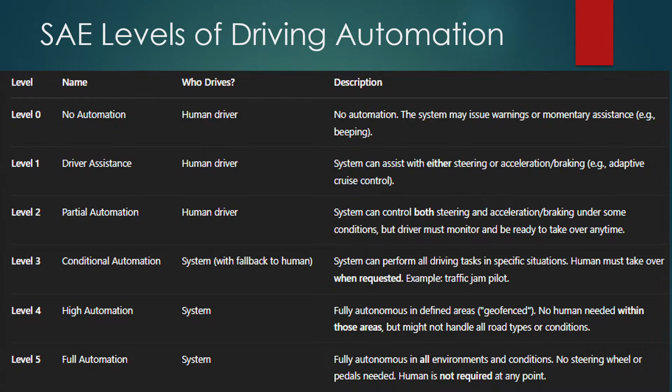So then we can see each level one by one with examples, so we'll understand it more. First, level 0 is like the conventional mid-range type of cars. Then level 1 is driver assistance system, where there's adaptive cruise control for speed only.

Lane keep assistant steers briefly to stay in a lane, like in Hyundai Elantra, Ford Focus. Then partial automation examples are like Tesla Autopilot, GM Super Cruise, Ford Blue Cruise, and Mercedes Benz Drive Pilot.

This is level 2 plus in some countries. Then level 3 is conditional automation. Mercedes-Benz Drive Pilot is certified level 3 in Germany and some US states, operating in traffic jams under 60 km per hour. Then Honda Legend in Japan is the only level 3 sedan, only available there.

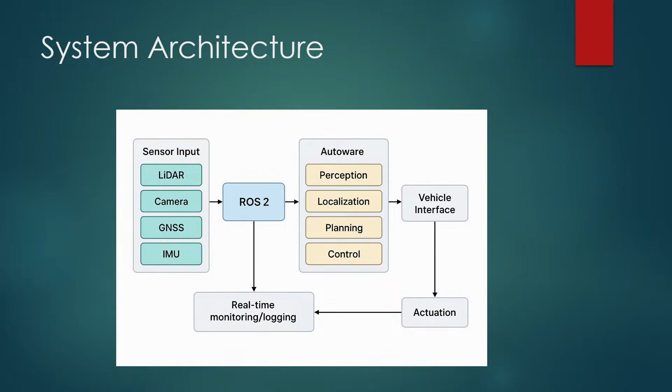AutoWare is actually implemented on top of ROS 2. ROS 2 is mainly used for communication purposes, linking all the different nodes - that's its main idea here. On top of ROS, all the perception, localization, planning, and control software is written in AutoWare. AutoWare controls the vehicle - the vehicle interface is fully controlled by AutoWare, and actuation and logging are done through it. So this is the architecture of our system.

So, robot operating system - software stack overview. What is ROS 2? It's a middleware framework for building modular robot applications, enabling communication between sensors, compute modules, and actuators. It's used by AutoWare as a core infrastructure - AutoWare uses this already existing communication system between sensors, compute modules, and actuators.

This whole thing is done through the idea of creating nodes. These nodes communicate with each other through a real-time operation DDS-based messaging system. In DDS, there is a publisher, a subscriber, and a topic - the publisher can publish data. For example, you have a sensor node in ROS, and that sensor data needs to be sent to two different nodes in the same system.

The sensor node doesn't need to establish communication individually with these two nodes, because that would take time - the first would have to wait for the second to finish, making communication very lagging. The advantage of the publish-subscribe method is that the sensor node publishes data using a common topic, and receiver nodes can subscribe to that topic. If they subscribe, they'll get the data - no matter what, whenever the publisher publishes, active receiver nodes will get the data.

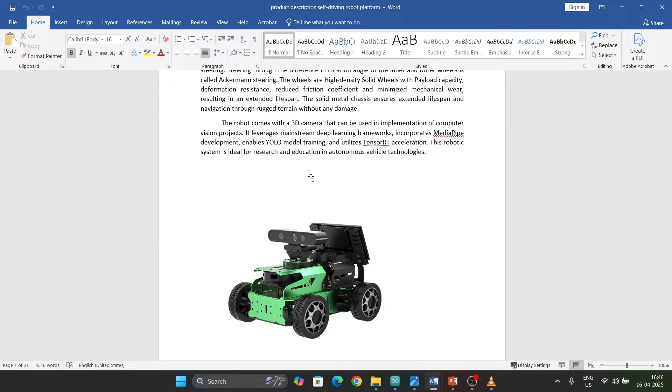So this is the autonomous mobile robot. It's a mobile robot. We have two levels - one we have with the robots, like four-wheeled robots, and another level we have with the EV. So here you can learn about automation and self-driving from both platforms. Whether you're using the car's platform or robot platform, you can learn so much from both platforms.

This autonomous mobile robot is powered by NVIDIA Jetson Nano, so it uses a smaller version. Like in the autonomous car, we have to use Orin or Xavier from the same Jetson series. Here we are using a more basic model like Nano. This Nano supports robot operating system - it's also implemented using robot operating system, and it also uses a 2D LiDAR sensor. So this is a car.

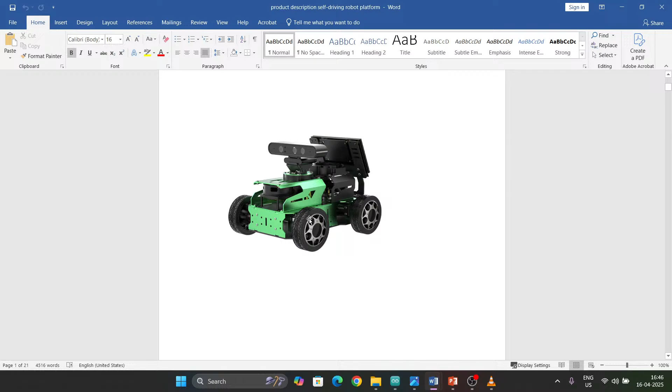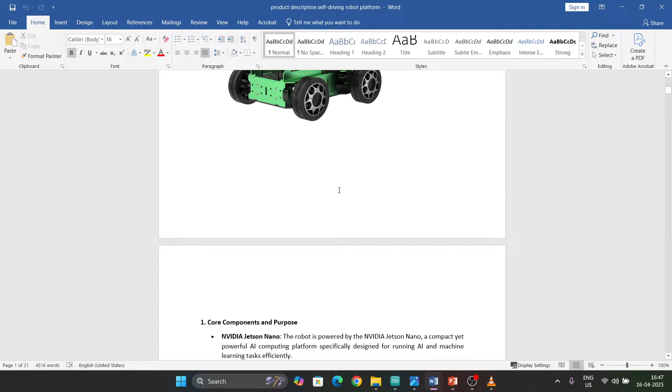So it has a 3D camera, and there is a 2D LiDAR, and it's a four-wheel car. The steering uses steering drive with a servo motor, and both rear end motors are encoder motors, geared DC encoder motors. There is an IMU sensor, and behind here there is a Jetson Nano. So this is a platform.

You can use it for learning. You can add more to it. It already has all these frameworks like TensorRT, TensorFlow, Keras, OpenCV already in it. It uses all these things. You can add more to it.

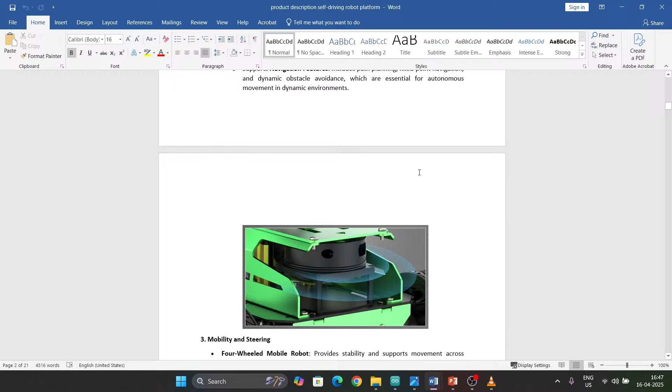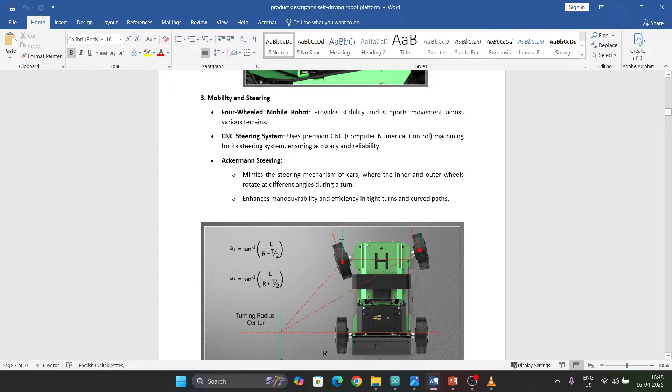So it uses 2D LiDAR for mapping and navigation and mobility steering. It uses this method called Ackermann steering, which mimics the steering mechanism of cars where the inner and outer wheels rotate at different angles during a turn, for maneuverability and efficiency in tight turns and curved paths.

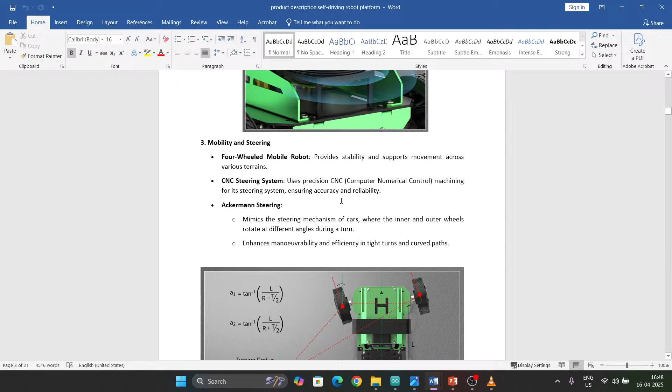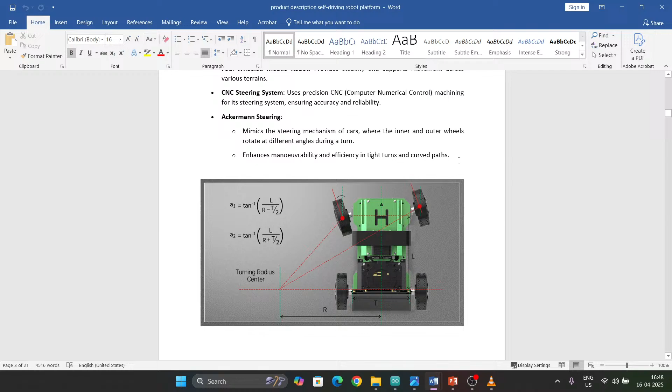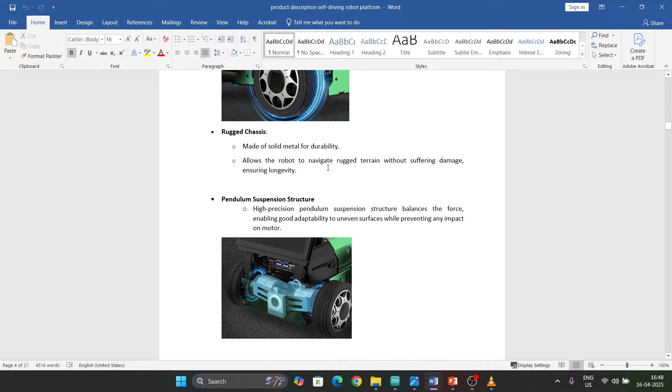So it's a very sturdy robot system, fully metal based, so it's very sturdy and rough. You can use it, and it will last for very long. If you have this, you can implement it in a lab system for many years. The wheels are very high density solid wheels, rugged chassis fully solid metal for durability, allowing the robot to navigate rugged terrain without suffering damage, ensuring longevity.

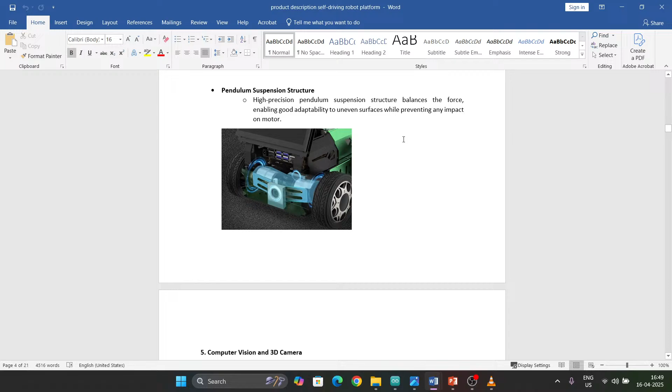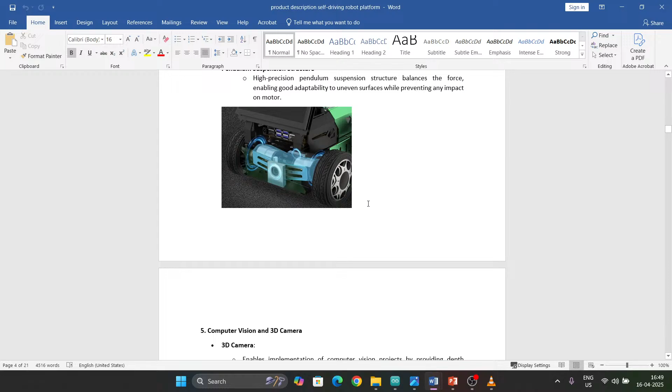Pendulum suspension - behind the wheels are not fully fixed. It has a suspension system, high precision pendulum suspension structure that balances the force, enabling good adaptability on uneven surfaces while preventing any impact on the motor. So it won't have a sudden collision impact with any obstacle affect the motors much, because it's not fully fixed - it's a pendulum suspension system.

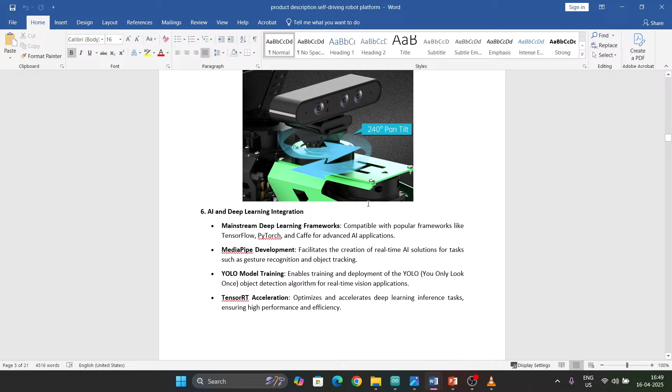Then there is a 3D camera for tasks like object detection, segmentation, and things like that. Then AI, deep learning and integration - it uses so many different things.

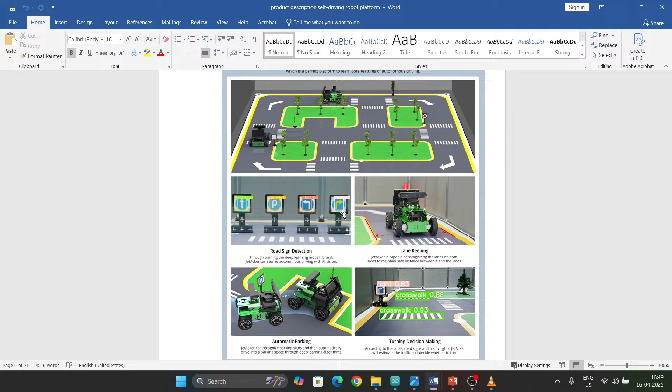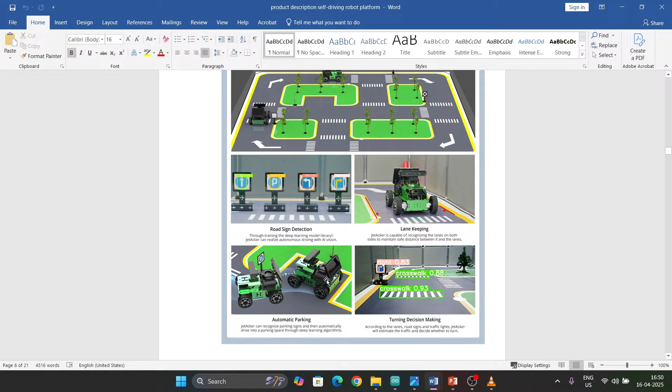So you can implement this type of lab setup where you have a small scale self-driving car setup. This is very useful because it uses the same exact type of algorithms and systems - like lane detection, sign detection, detecting crosswalks and signboards, and it can also use the camera for automatic parking. So this is very useful when it comes to learning about self-driving cars in a scaled indoor environment.

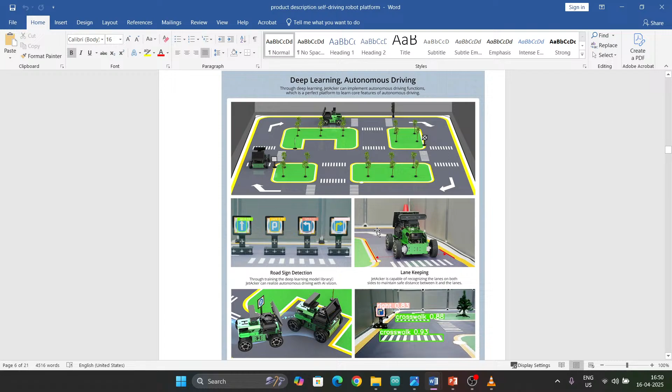So this is the system. I can show you a demo of this. It's not the same lab setup - it's just our office space. So the car is, initially, I can just explain as the video is playing.

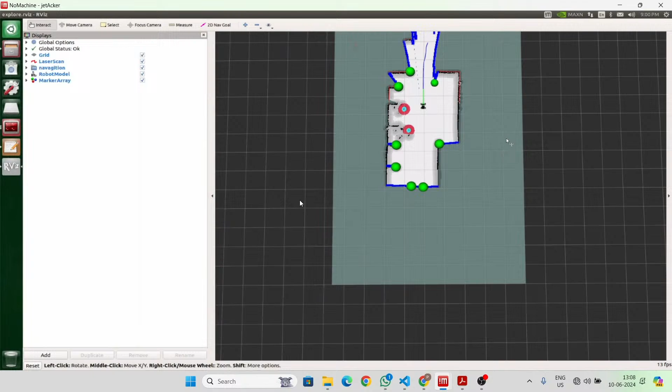So this is RVIZ, robot visualizer - this is the visualizer part of the robot operating system. Right now what is happening is the robot is using the LiDAR sensor, and we are mapping the environment. This is an office space.

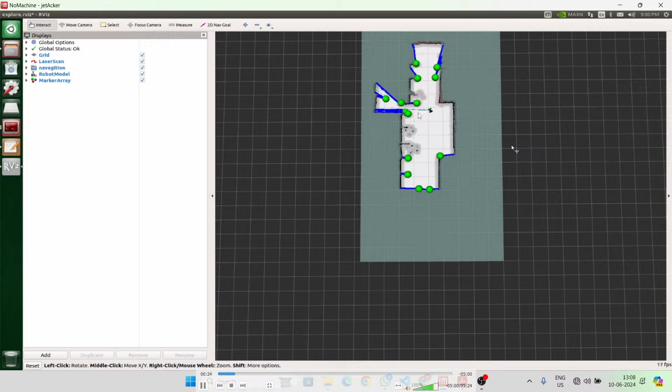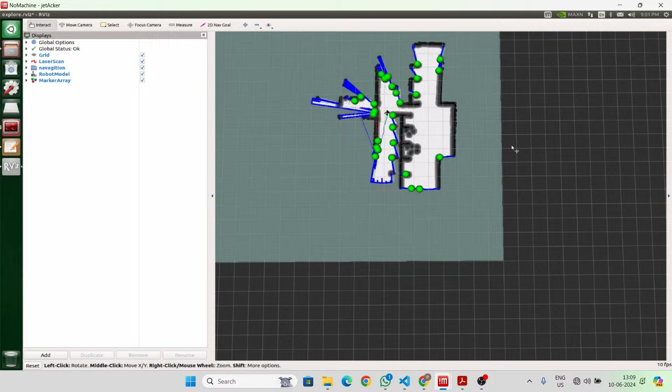This is the one floor, and you can see these are different cubicles here. There is the door, and here you can see the door, and it's moving around and building a map. I'm not even controlling the robot - the robot is using an automatic moving mechanism. It's on its own, it's moving. There is no remote control.

Nothing's there. But this is not autonomous navigation. Autonomous navigation means we should be able to tell the robot where to go - I can just say, right now I'm just waiting for the robot to map. So there is one more room here, so it needs to go there and map it.

Once it's done with that mapping, I'll just save the map using this command here - rosrun map. That's another thing - there are so many command lines in ROS that are very helpful, that come in very handy for this type of operation. Like I'm going to save the map right now. The map has all the play areas mapped, other than this small portion here. So I'll just save the map.

Right now it knows that it didn't go to this place, so a path is automatically created, and it is going there to map that unmapped area. So it is just exploring the areas right now. So right now I just press enter, and it saved the map.

Then I'm just going to run autonomous navigation right now. I'll just copy paste the map. Right now I'm launching the autonomous navigation. So SLAM here.

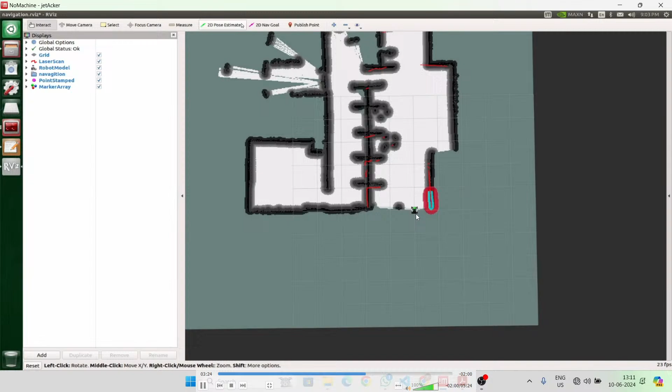So that is an actual robot that you're seeing in the RViz visualizer. I can show you the real video in a minute. So this is the visualizer, showing an actual robot and the environment that we just mapped.

Right now, I'm just giving the destination. I want the robot to move to this location. So it starts moving. This moving thing is a velocity vector, showing which direction to go.

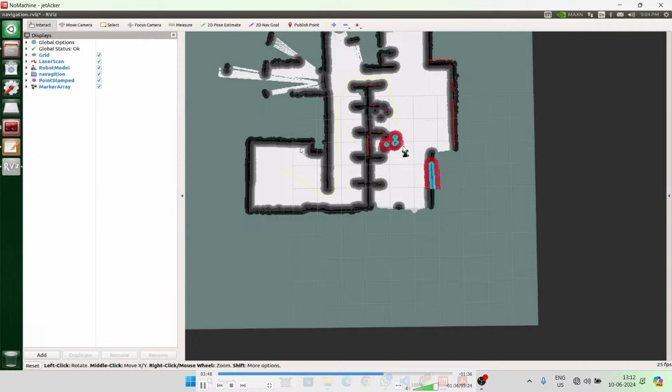So it will always stick with the edge because it wants to follow the shortest path. It can move around and there is so much space here, but still it's sticking to the edge because it always wants to follow the shortest path.

Right now there's a small problem, so it's taking reverse. It's a very congested space, so that's why it's not able to move properly. There is a judgment problem there, so it went too far and took reverse. Now it's just going the right way.

So it'll just do what I told it to do. It'll just go, and that's a separate room. So it is entering that room through the door.

All the black part is the walls, and the white is the free space. And that blue part, this is an inflation map.

It's the local map and global map, and this is the local map. The local map only maps the immediate surroundings. It's not concerned with all the surroundings, only the immediate surroundings, with an inflation layer.

Inflation layer means this is to avoid collision. There is nothing here in this red part, but the robot will still avoid it. Also this blue part, there is nothing there, but still the robot will try to avoid it because it will try to avoid any collision.

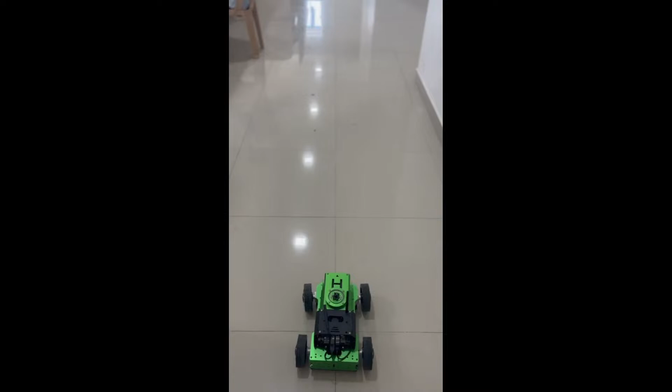So I can just show you the real video of the same thing. This is the real video of the same place that we saw in that visualizer. Everything is sticking to the edge.

So all the black space that we saw was these cubicles and stairs. Right now you can see it moves forward a little farther and it won't be able to turn completely, but there is nothing there.

Still it won't, there is nothing there. It can easily make the turn, but because of the inflation layer that I added, it is not going to go too close to the wall. To avoid collision, we just add that type of thing.

So it will always keep some distance from the wall. If there is no space, it takes more time. You can see it's going to stick to the other side of the wall. It always follows the shortest path.

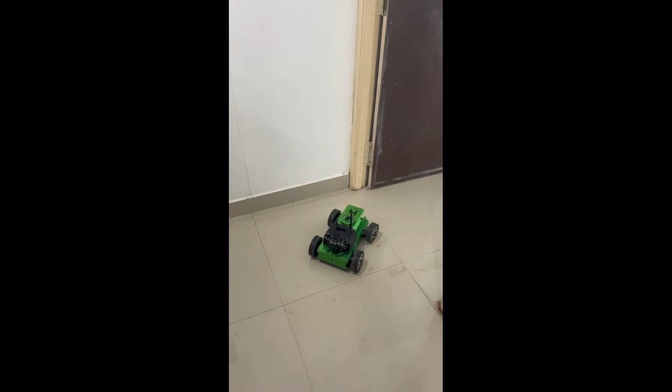So now we just right click for the second one. There is no operation. So I'll just give you a controller location, so we'll start here. It reaches the location.

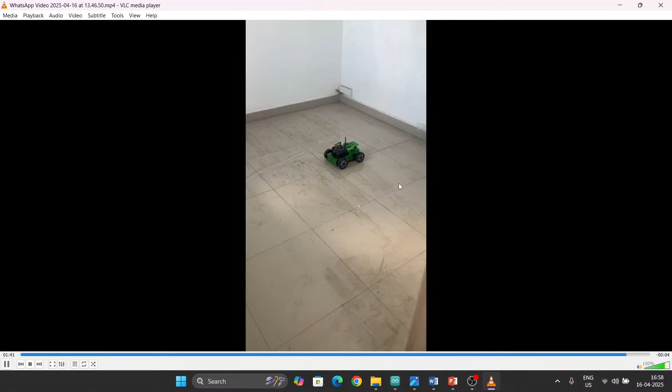So that's the demo output of the system. This is an example of robot operating system, what we are doing here. So I've installed...

This is Ubuntu installed, Ubuntu 20 version, installed 22 version here. It isn't exactly Ubuntu, it's a Ubuntu version installed that supports Jetson Nano, and all the packages, everything is installed in the Jetson Nano itself.